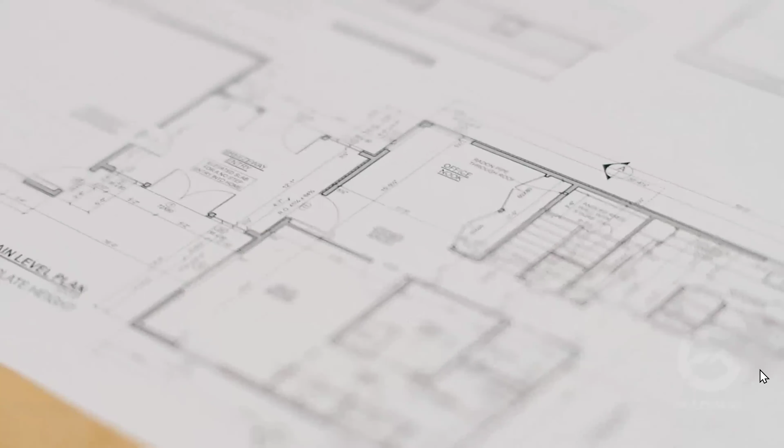This house was designed by a committee with lots of good people with background and experience. We believe in Tesla's corporate vision of creating a more sustainable planet. We got a hold of Greenway Solar, a Tesla certified installer for the Midwest area.

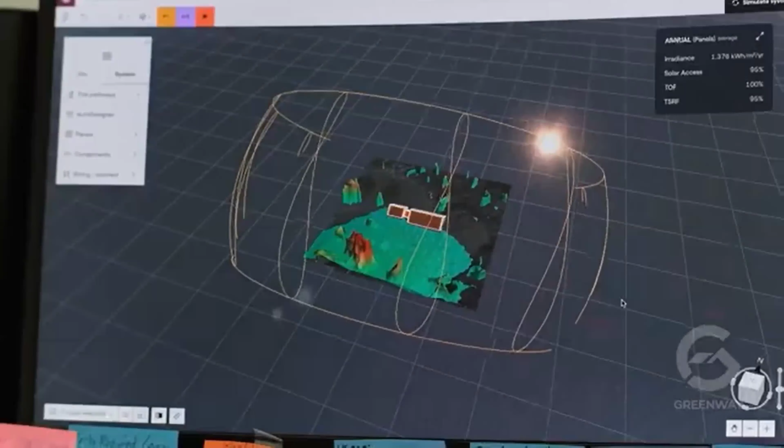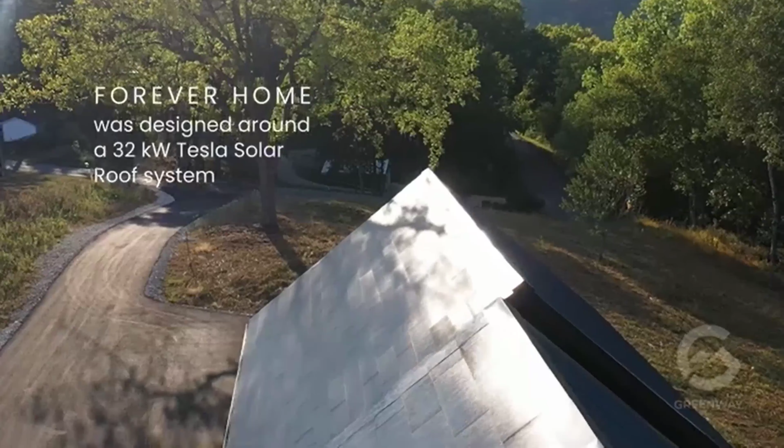And then we worked with Aurora software to position the house on the site so we got maximum solar benefit. Between the roof and the garage, our system generates 32 kilowatts of power. We have a SPAN smart electric panel.

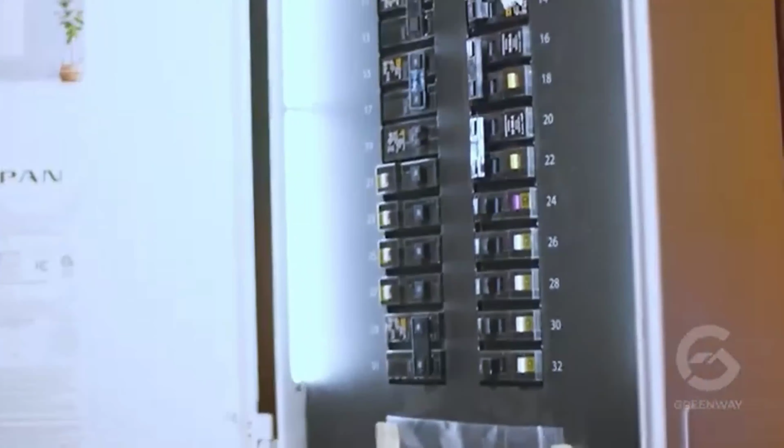A smart panel is something that can be controlled remotely. It also allows us to monitor home usage. We have a car charger in our garage, and that is our number one energy use. Then the heating system is second, the water heater is third. My office, with just the computer and printer, is our 4th largest energy user in this home.

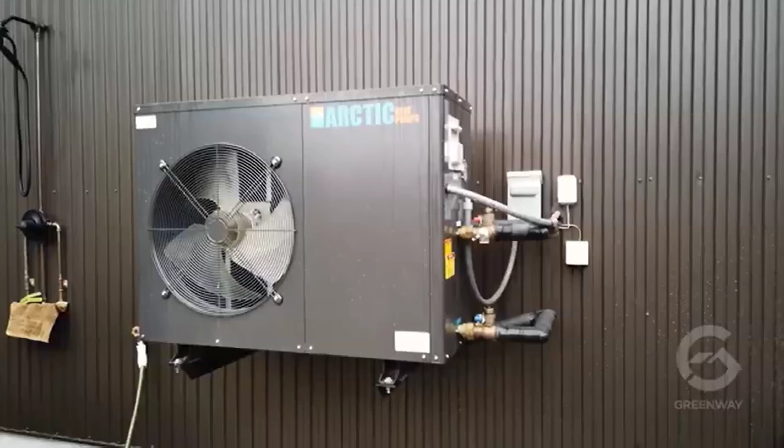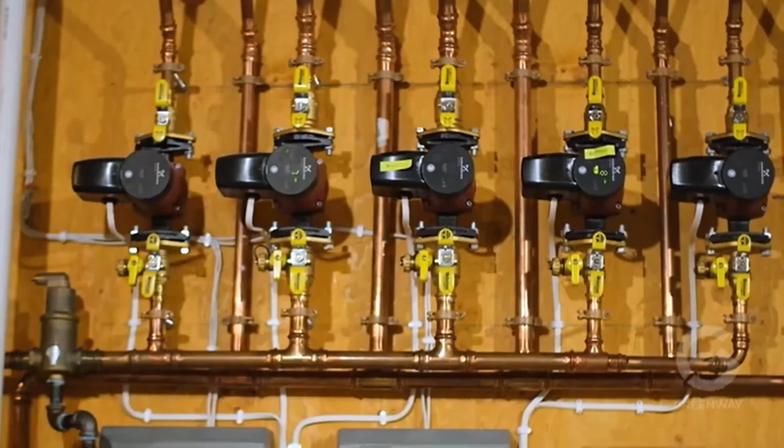So this is our Arctic air-to-water heat pump. It heats and cools the whole building. It's rated at 2.5 tons. This uses water to take either the heat or the cool into the house, and water is a much more energy efficient transfer mechanism. Good down to 22 below.

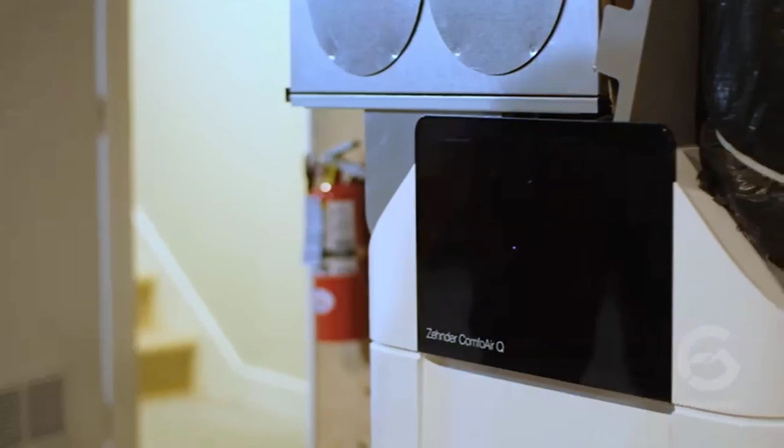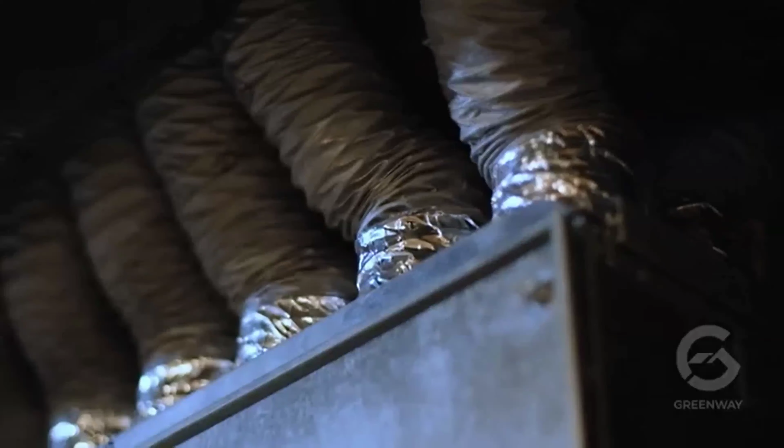So the advantage of having an airtight house is it takes less to heat it in the wintertime and it takes less to cool it in the summertime. This is a Zehnder energy recovery ventilator. It's a Swiss system. These tubes in the walls, or you can see them overhead, go to the air handling vents in the building. The installation was flawless and went well.

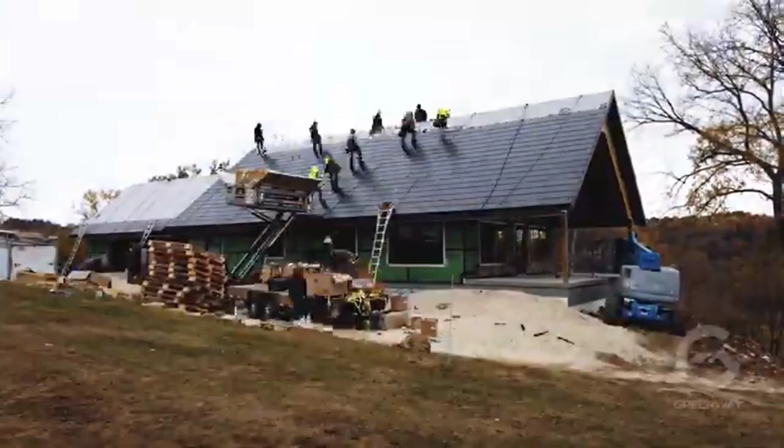They have electricians that are busy hooking this all together, making sure that each shingle is running, and they also make sure that each run of shingles is hooked together in series and working.

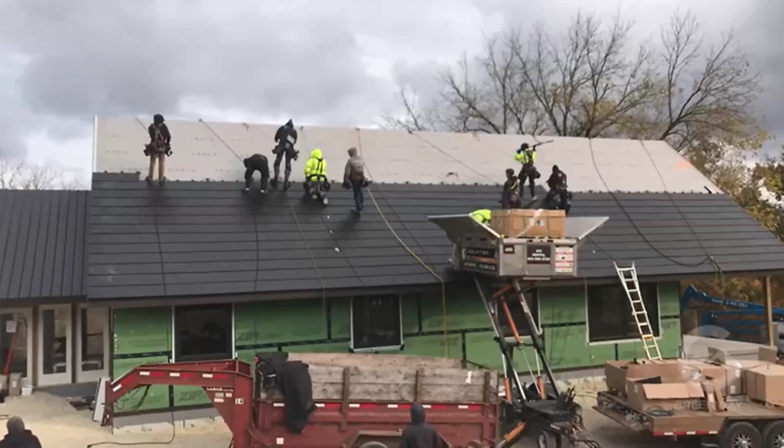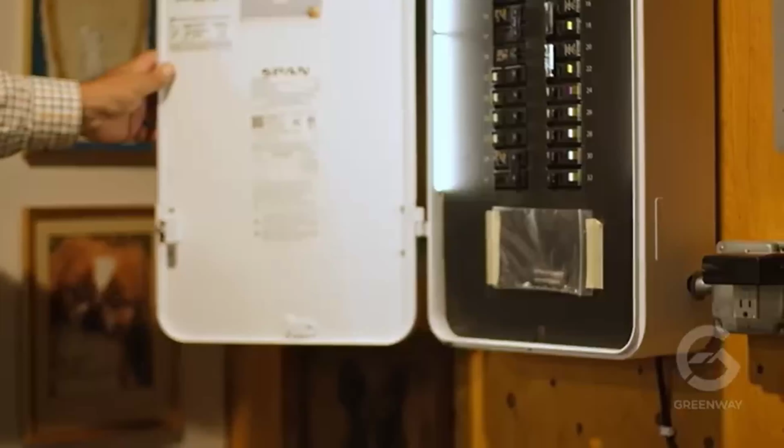Power comes down off the roof, and you can see these are labeled solar, PV, direct current circuit. So the direct current comes down into the inverters where it's converted to alternating current. It goes out into the gateway outside. The gateway then sends it back into the SPAN smart panel here, where it's used for the house, to the battery, or off to the grid.

The backup battery is 13.5 kilowatts. In the summer, we've gone 3.5 days with no grid power. So we're charging our car, we're heating our house, we're having all the electric benefits. And our system is making us money.

We just simply decided to pay ahead. For us, it was how to live as environmentally correct as we possibly could, to eliminate fossil fuels as much as we could. We bought our future.

All right, so that gives you a little overview on what we did. This is a Google Slide presentation that we'll step through.

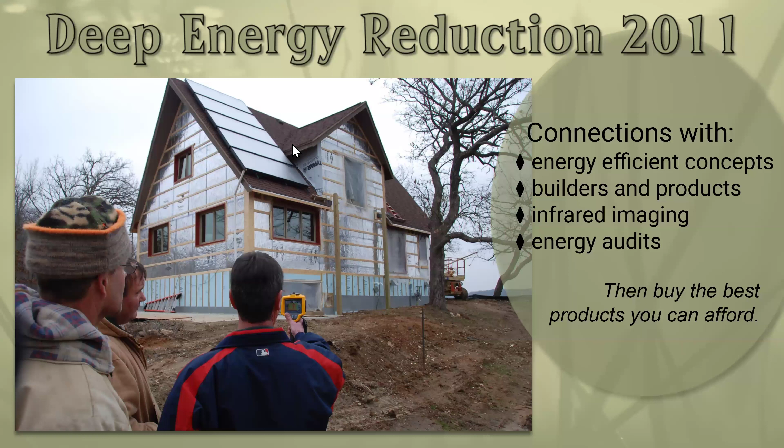As I said at the beginning, this was the residence at Eagle Bluff that we did a deep energy reduction retrofit on back in 2011. Based on one year's energy data once it was completed, we reduced the energy use in that home by 78%. You heard that right, 78%. We became the 9th home in North America to document greater than 70% energy reduction.

We basically did it by super insulating the envelope. When we're done, I'll have some more slides about that to give more information. These are the two builders: Jeff Valine from Zumbro Falls and his partner Joe Yenny.

We told these guys as we were doing this that we were going to bring in thermal imaging to make sure and find out where there were any leaks anywhere in the building before we allowed them to put the siding on. They are fantastic builders to start with, and they were meticulous about caulking and sealing any crack in the insulation. You can see everything is taped, and it's done as well as it could be.

We ended up almost at passive standards, which is unheard of for a remodeling project. We did solar hot water, and if I had to do one thing over again, I probably would not do that. We also did it because we were an environmental learning center, as a teaching aid, by having a college come in with their students and install this—and their installation skills could have been better.

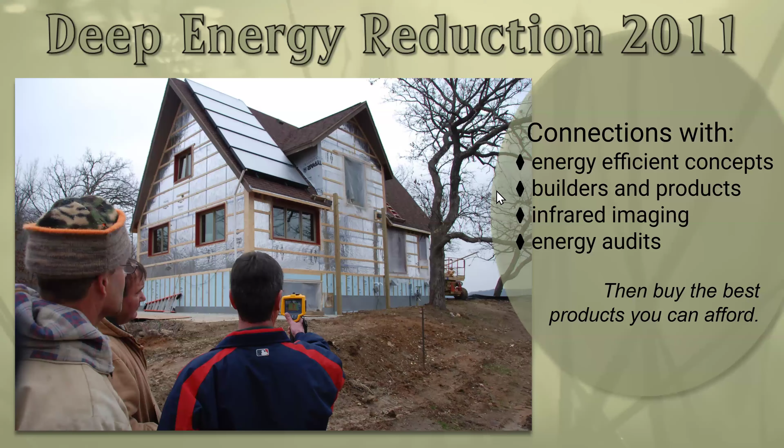You can see the things that we learned: energy concepts, working with builders and products, thermal imaging, and we did energy audits. So if you can't afford to build a house, you can do an energy audit and find out what's the biggest bang for your buck. That's what everyone needs to start out doing—an energy audit—to figure out what you can do to improve where you live, and then buy the best product you can for the money.

This is kind of a timeline of how it went doing our building. We decided to build in December. In January, we found out that solar shingles were available in Minnesota, and we put money down on solar shingles, not having a location or a building yet. We then used Google Earth to identify 3 sites in Lanesboro that had solar potential. We talked to the landowners and ended up purchasing the most favorable site.

Then we worked with a home designer and a good crew to design the home. And then in May, we actually got around to getting going on the whole process.

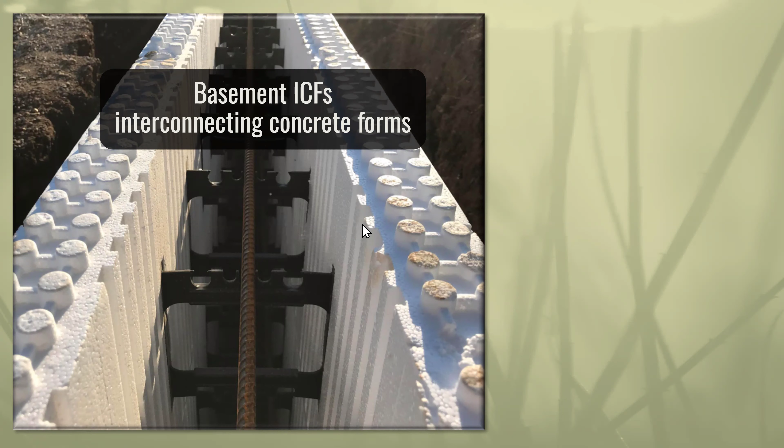So for conventional building, the basement has ICFs—interconnecting concrete forms—which keeps the cold out and the heat inside, and is structurally sound. We have in-floor heating zones in the house; we have 2 of them. We also have insulation underneath the basement floor so we don't heat all the ground below us.

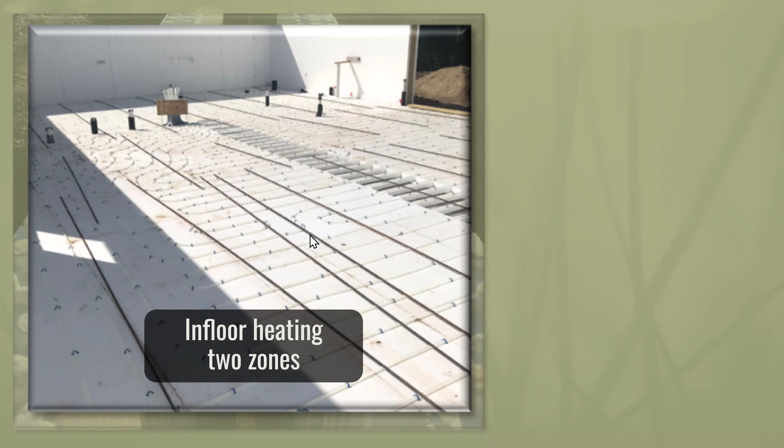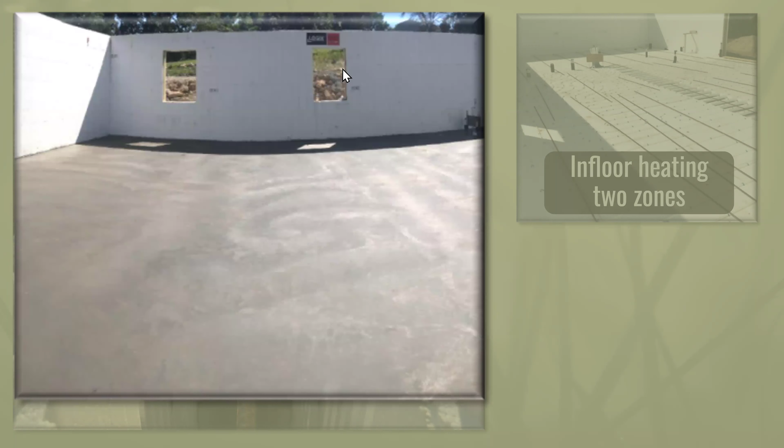What it looked like when it was done. So it's a walkout basement. These are egress windows into the 2 bedrooms in the basement, so you can see everything in the basement.

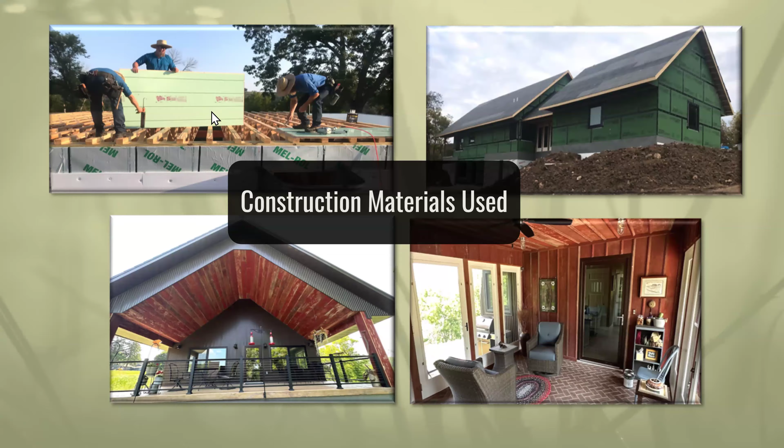We used various different construction materials that are pretty much industry standards. We started off with warm board, which has our in-floor heating in it. You can see it's tongue and groove, but this is a stamped aluminum panel over the structural wood, and the aluminum dissipates the heat or cold across the whole panel. So you don't have a hot spot here and a hot spot there, it warms up the whole panel.

Our building crew was 4 Amish brothers, and they were just a hoot to work with, fantastic on doing this. They were busy but wanted to do this house because they wanted to learn about solar shingles and battery storage. Kind of the fun of this whole process is that most of the contractors, since we didn't start working with them until May, were basically booked for the summer, but added us on because they wanted to work with the technology we're trying to put in place.

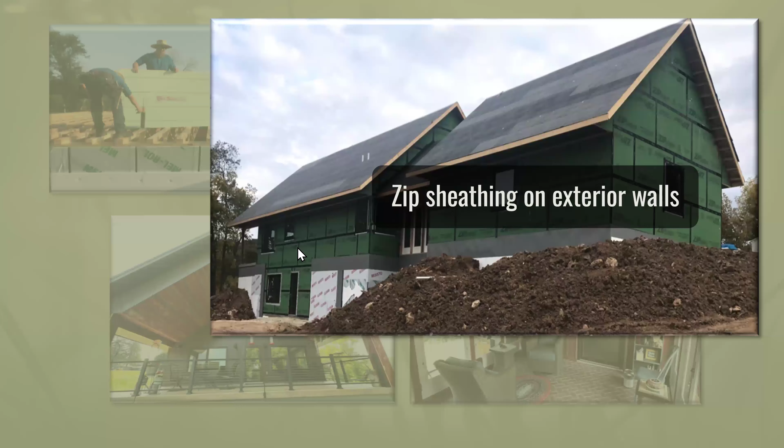So zip sheathing is this green stuff. It basically has an impervious membrane on the outside, a structural wood component, and some sort of insulation depending on how much you want to put on the inside. You take all the joints and it gives you truly a waterproof exterior membrane.

I grew up on a farm in Red Wing, and there's a picture of the barn right here. We ended up taking down the barn about 12 years before we built the house and stored the barn siding and beams, finally getting around to using it in the construction of our home. This is our east-facing deck with the barn decking on it. This is our breezeway, and you'll see photos of the interior of the garage, which also has the decking. We used some of the beams on a pergola off to the north.

Heating and cooling. This is an Arctic air-to-water heat pump, out of Canada. It's air-to-water, not air-to-air, which is more energy efficient. It works down to 22 below, so it's been a very interesting system to have.

We've got basically 3 winters under our belt, and it's worked really well handling our heating and cooling. We have 5 heating zones, and our basement heating zone, because there's so much heat on the air handling system brought down in the basement, wasn't running enough, so when we actually called for heat, one of the pumps was frozen up. I had to replace a pump, not because of overuse, but because of underuse.

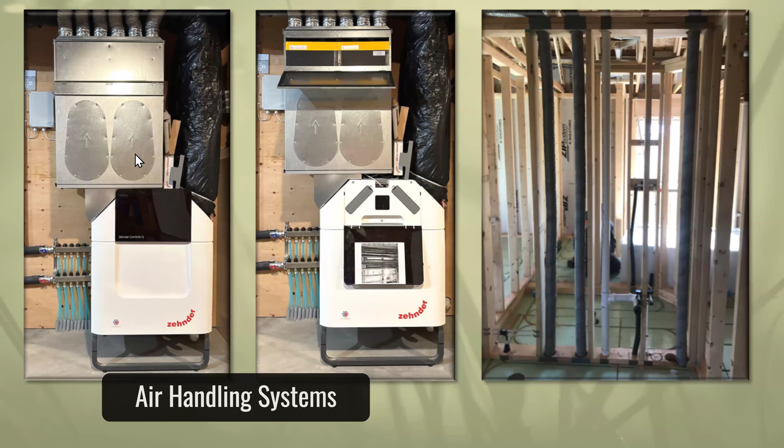This is our Zehnder, which is a Swiss air handling system. The air handling system uses these dryer vent-like ducts that run right into the stud wall. You can see them going out the top. It has 2 replaceable filters that you can replace easily, usually on a quarterly basis.

On top, it has an activated charcoal set of filters and HEPA filters. The HEPA filters take out all those nice little things, and all the nice little Canadian smoke that comes in that we don't want to breathe. It's a very quiet system, and the replaceable filters make it inexpensive to have clean air going through your house 24/7, 365. We also have a carbon dioxide sensor to monitor, depending on how many people we have in the house, what speed we want to run the air handling system at.

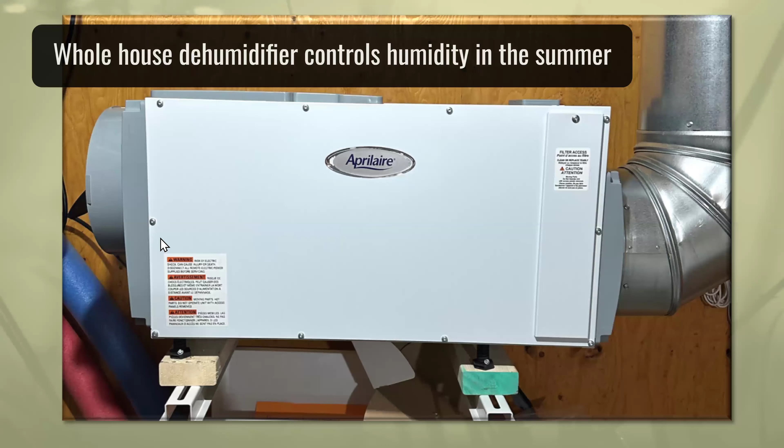We have a whole house dehumidifier, and the importance of this is because we have in-floor cooling, you heard that right, in-floor cooling in the summertime. If there's a high dew point or high humidity in the house, we could have condensation on the floor. So the heating system has a humidity monitoring gauge that as humidity in the house goes up, so does the water temperature in your cooling water, which we don't want because we want to cool our house down. So the function of the whole house dehumidifier is to take the humidity out of the air so we can have cold water cooling our house.

Talked about the SPAN Smart Electric Panel, which cost about $2,000 extra. It was one of those things you kind of wonder about, is it worth the money? I want to show you this slide.

One of the first months we started using this, I think in February, this is March 17th, shows our backup boiler, which was supposed to be providing secondary heat, was running 66% of the time, while our Arctic heat pump was only running 8% of the time. Without this, I would have been clueless, we wouldn't have known the backup boiler was set improperly. We had to get it recalibrated, or we would have had a tremendous electric bill for heating our home. So this paid for itself the first month.

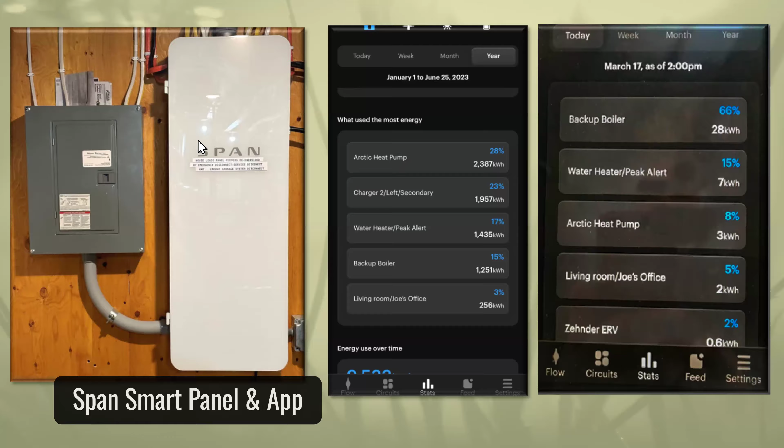This is the SPAN summary data showing what we did. In the first year, only through February 15th, so about 10 and a half months, the house produced 42,000 kilowatts, consumed 23,000, got 8,000 from the grid, and exported 27,000. You can get all this data and check your circuits at any point in time.

It has 3 different levels. If your power goes out and you're on must-have circuits only, we'd have 8 hours and 32 minutes of power. Any time you get notice the power's out, you can add or drop circuits remotely, wherever you are. If you want your whole house running, you've got 2 hours. Depending on your battery charge, there are things you can do to adapt how long your battery will last.

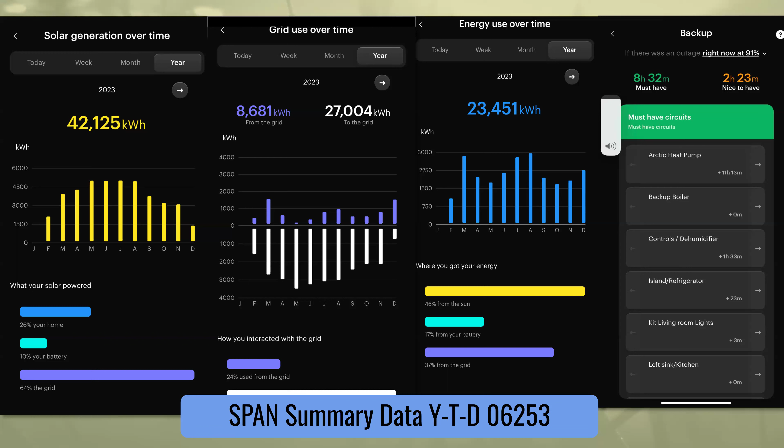We have data from this summer when the power went out at 7:30 in the morning. Our battery was at about 13% when the power went off. The power was off for half an hour, and the battery powered the whole house during that time. When the power came back on, our battery was up to 18% — it had actually increased its storage while powering the whole house.

These are Canadian-made Access windows, so it's ACCESS brand windows. They open in and also open up as an awning window. They're triple pane windows that are very energy efficient. When the Amish were building, they'd walk along the side of the house with their shirt sleeves rolled up just to see if they could feel any cold air on the hairs of their arms.

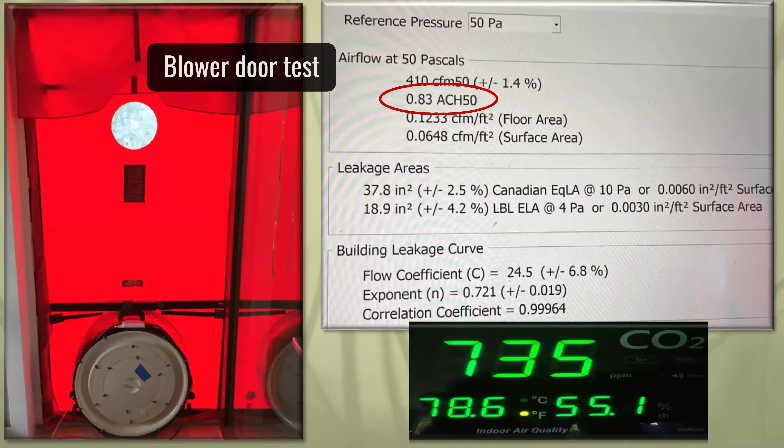We did a blower door test when the house was complete, and at 50 pascals we measured 0.8 air exchanges. To be passive standard, you have to be at 0.6, so we were 2/10 away from passive standards, which we really weren't trying to achieve.

As I mentioned, we have a carbon dioxide sensor that gives us an idea of the CO2 levels in the building. Mary and I are here by ourselves most of the time. Sometimes we have 2 to 8 friends over, and we click up to speed 1. If we have 20 people over, we click up to the 3rd speed, and if we have more than that, we open the windows because our carbon dioxide levels go too high since the house is airtight.

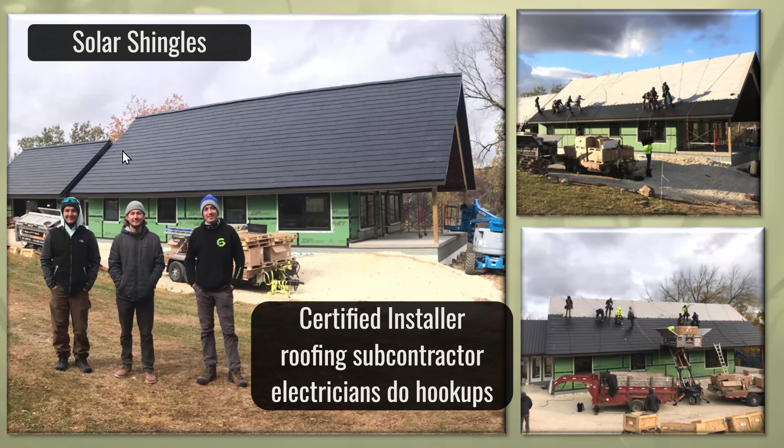The solar shingles you can see both on the house and the garage provide 32 kilowatts of power.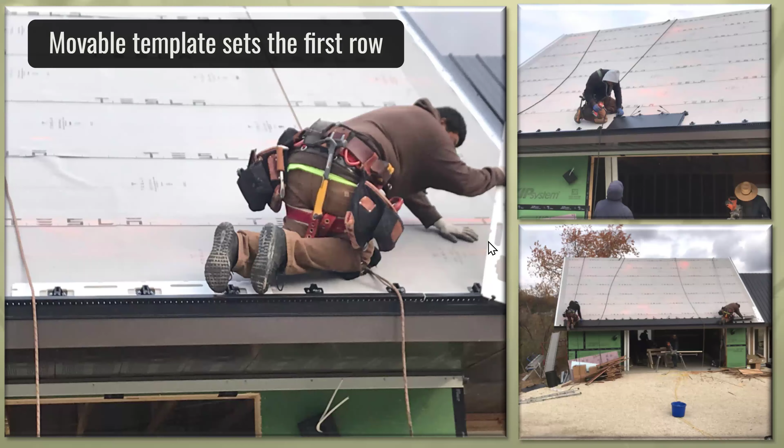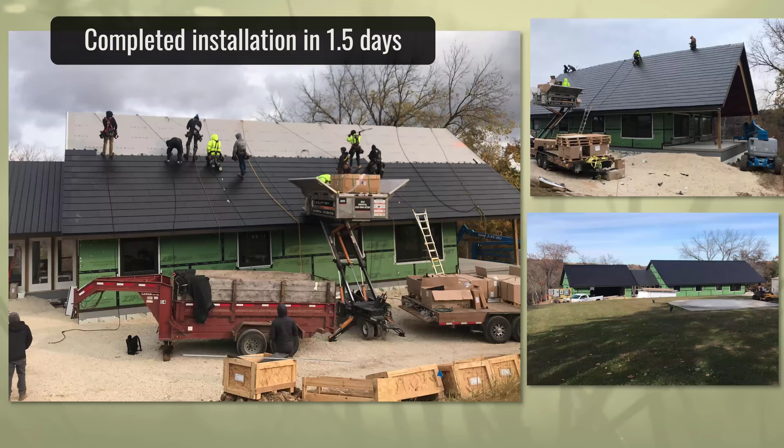It was an easy installation. They have templates they put down that position the hangers in place, then they start putting the shingles down. The shingles are screwed onto the roof deck, which has ice and snow melt underneath it. Then clips on the bottom fasten into place, and they're easy to install. If one has a faulty problem, they can easily replace it, assuming they can get up on the roof. It took them a day and a half to do the whole installation.

Greenway Solar was just fantastic to work with. We haven't had any issues, so I highly recommend them to anybody in the Midwest.

These are the runs of the shingles. If you're the electrical engineer type, you can see there's 28 shingles in this run, 28, 20, 33 coming down here, going into the inverters, out to the generation panel, the AC disconnect, the PV production, into the gateway, which sends it to the main service meter, back to the Powerwall, into the house, or into the smart panel.

So we had 443 solar shingles that are 72 watts each. You've got all the information here — if anybody wants access to this, let me know and we'll send it off to you.

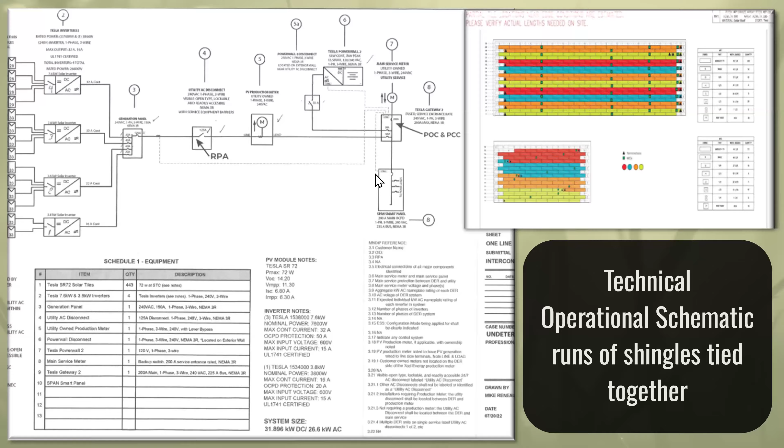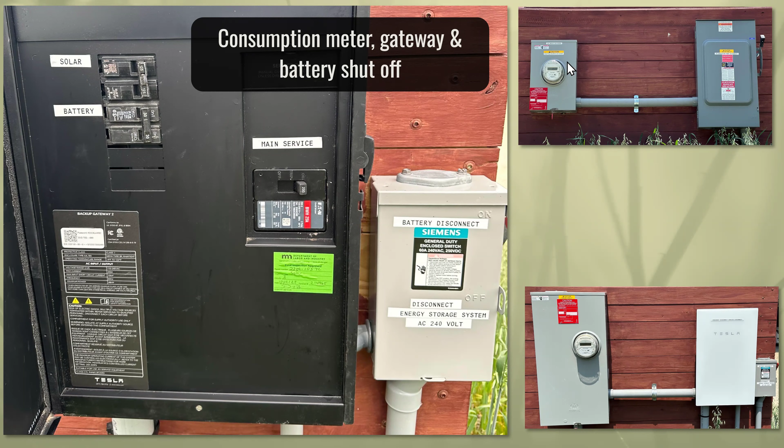This is the outside electric panels. This is the gateway, if you will, consumption meter. There is a battery disconnect external to it. Here we go.

This is our Powerwall backup. The Powerwall is 13.5 kilowatts in size, and you can set it to discharge down to whatever level you want. Here you can see we have it set to discharge down to 10% every night at this time, and then during the day it recharges.

So if we turn our hot water heater off at night, this is where we went 3 days without any solar, but that was with the hot water turned off. You can see we can actually make it through the evening using just battery storage. However, we seem to like hot water, so for the most part we don't do that, but it's possible.

And then if there is a NOAA weather alert, the battery automatically charges to 100% and stays at that level until the weather alert expires.

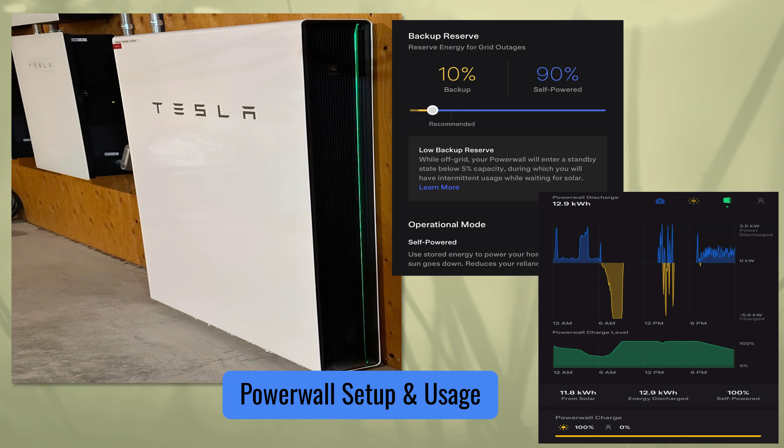So this is the solar shingles main Tesla app. It has 3 different screens: energy, impact, and settings.

You can see where we were at on how much solar we generated on an individual day. And these are the settings on the Powerwall, how to do EV charging, your storm setting, what your utility plan is, Wi-Fi, and other things.

So this is some data, and it has these 4 different screens that you can see. What's circled is what's shown. This is the house - started off not using battery, used a little battery, and then we're using grid power. The gray is grid power, using solar power, back to battery and grid. So that was what the house used and where the battery came from.

This is then solar power. Solar started off powering the house, powering the battery, house and battery, all going to the grid, back to the house and battery, and just the house. So 30% went to the house, 34% to the house, 6% to the battery, and 60% went to the grid during that particular day, May 2nd, a peak solar generation day.

We generated 234 kilowatts. This is just the Powerwall - we didn't make it through the night because our water heater was on, and then this is going off to the grid, power coming in from the grid, power going out. So our net grid usage for that day was negative 134 kilowatts.

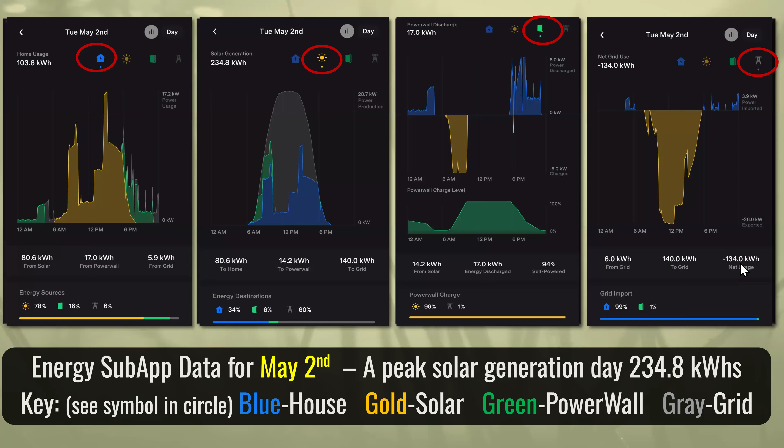This is what I was mentioning earlier. We had a grid outage, and you get this little notice that appears on your phone, on your app, saying there's a grid outage, you've got 1 hour battery backup left, reduce your power immediately.

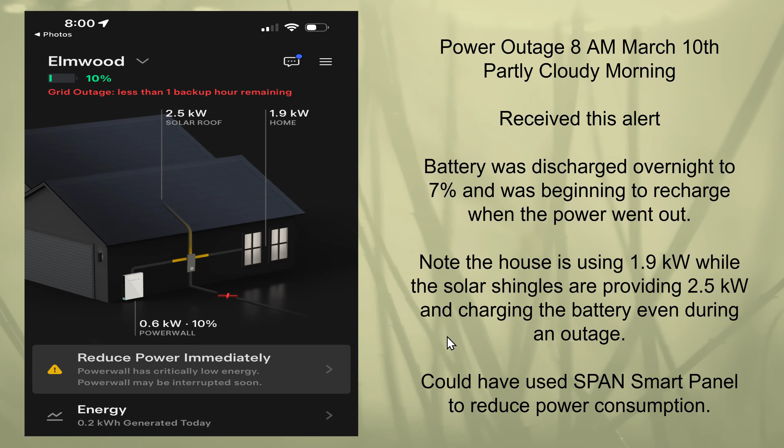And as I said, it was a partly cloudy day. The battery was down to 7% when the power went out. The house is using 1.9 kilowatts right now, and the shingles are providing 2.5, so it's providing 0.6 kilowatts more than we were using. And then, as I said, we have the SPAN smart electric panel, which automatically sheds load, but you can also control individual circuits remotely.

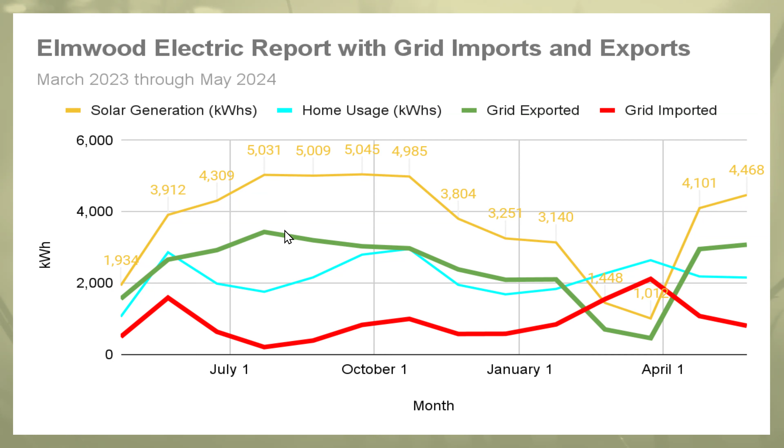And what we're most interested in at some point in time is vehicle to home or vehicle to grid - Tesla calls it power share. If you're looking at our backup battery, remember it's 13.5 kilowatts, and we paid about 15 grand for that, or $1,000 a kilowatt. The battery we have in our car is 75 kilowatts. So you have a lot more battery power in a car for a cheaper price than you can buy batteries for your home.

So we can get vehicle to home or vehicle to grid and get power sharing in place. That will be a great addition to homes in Minnesota during winter months when solar production is low. This is already available on the Ford F-150 Lightning pickups and the Cybertruck, and supposedly the software is available on newer Tesla cars, but it hasn't gone to full release yet.

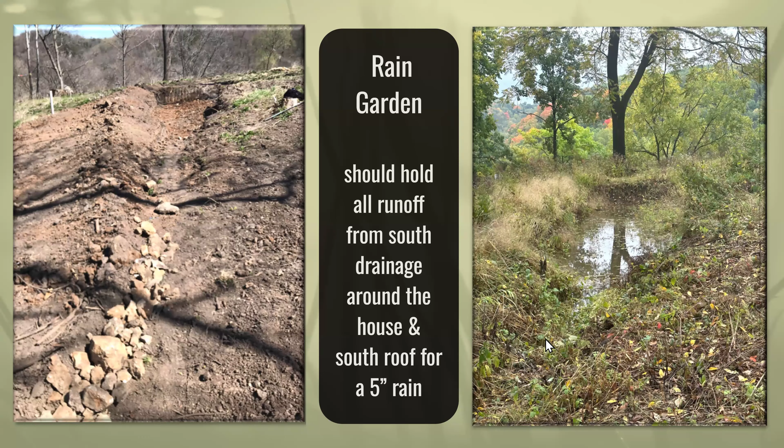We have a very small amount of lawn that we mow, and most of our lawn is a short grass pollinator prairie.

Joe, are you still there? It appears not — I'll give him a quick call and see what happened on his end. Yeah, his face is frozen in the gallery, so his internet probably dropped.

Ted, how was the spaghetti? Sorry, you're muted, Ted.

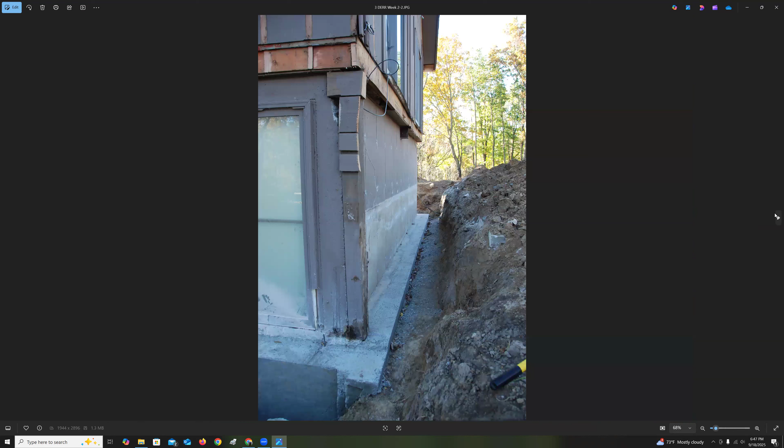So when we did the retrofit, it turns out this house is a CAP home, a prefabbed house that was brought in, and they poured the concrete foundation 6 inches short on the west end and 3 inches short on the north end. So we had a 6 inch overhang here and a 3 inch overhang there. Prevailing winds are from the west-northwest, and our hydronic heating system pipes were located right up above that. So every time we had a blizzard, those pipes would freeze up and either rupture or burst, which made living there interesting.

So when we did the reduction retrofit, we put in new footings all the way around the house. We corrected the 6 inch overhang and added 6 additional inches of insulation, so we have 9 and 12 inches of extra insulation around the basement.

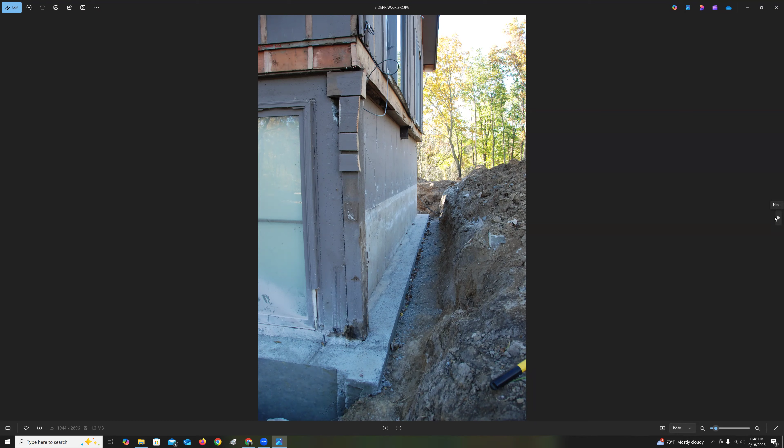You talk about an improvement on the energy efficiency of the basement—let me tell you, day and night.

We were looking at trying to do thermal heat storage. We were trying to put in something like a big bulk tank or water storage system where we could take extra summer heat and store it for winter consumption. But we couldn't find any storage system that was energy efficient enough to store the heat for long periods of time and still get a payback. So we ended up filling that in.

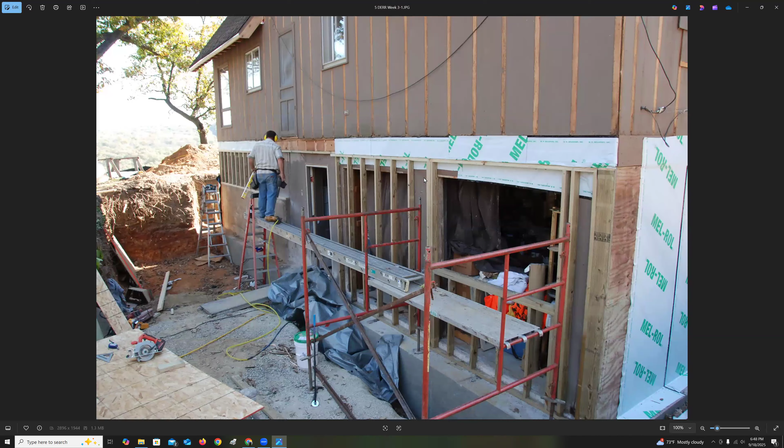But here we are, truing up the 3 inches to add the 6 inches. We eliminated the glass patio doors to the north here.

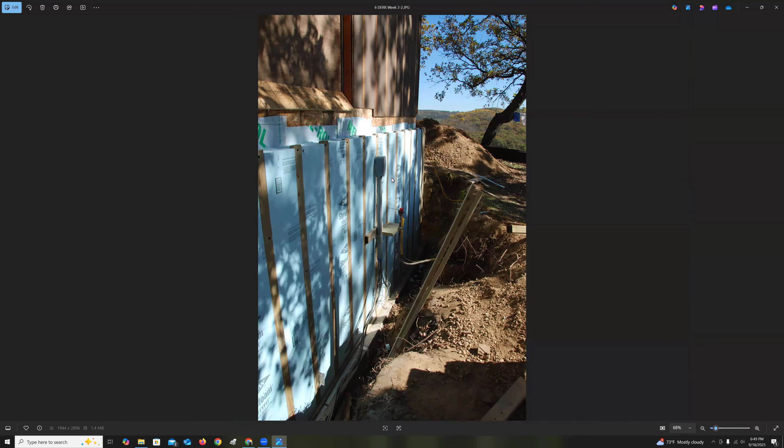So this is our 6 inches of XPS being added along the exterior, holding everything in place. And we have an exterior deck that is no longer cantilevered off the house, so we don't have thermal bridging coming off of that.

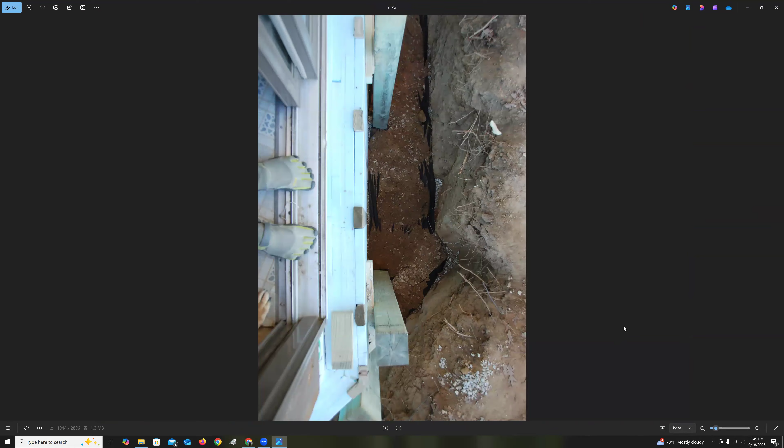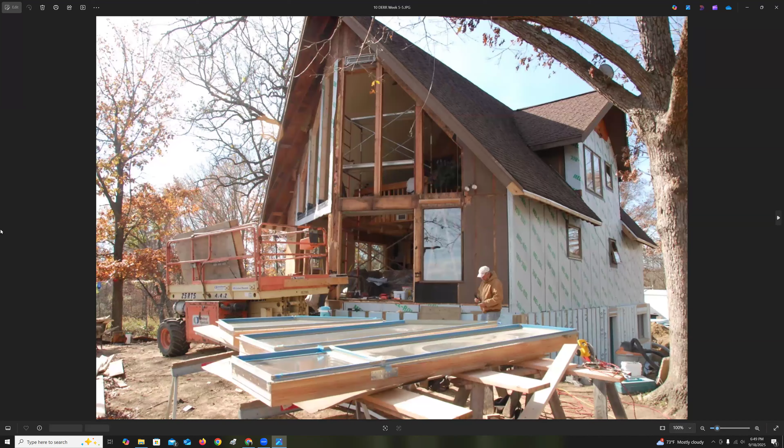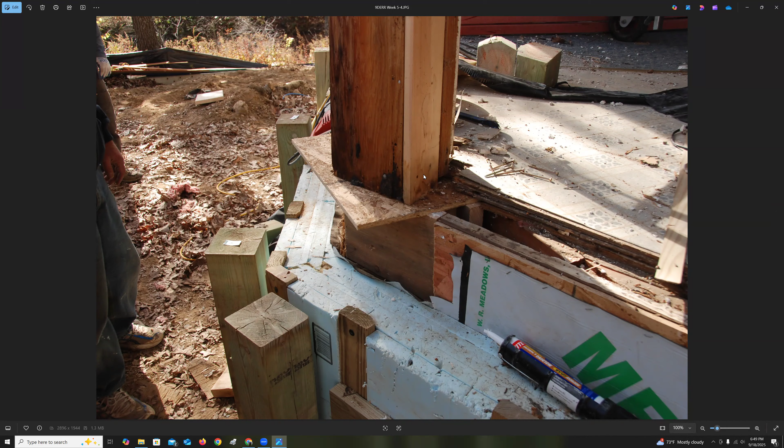Every seam, as I said, was caulked. They were overlapped—the builders did a fantastic job sealing everything up. The main wall with all this glass right here basically had a 3/4 inch gap underneath it, where it was freestanding, hanging off the roof. So we ended up correcting that.

We took out this window to the north, and these two windows to the north, and we ended up adding a window to the south. It was somewhat of a sacrifice to take away the tremendous view upstream, but we ended up getting a functional window to the south.

You can see these were Loewen, another Canadian company, triple pane windows that we ended up installing. It made it a little bit brisk living at the house at this time of year.

So you can see there's the windows gone—installation on the south side. Window gone here, two windows gone there. Insulation on the bottom.

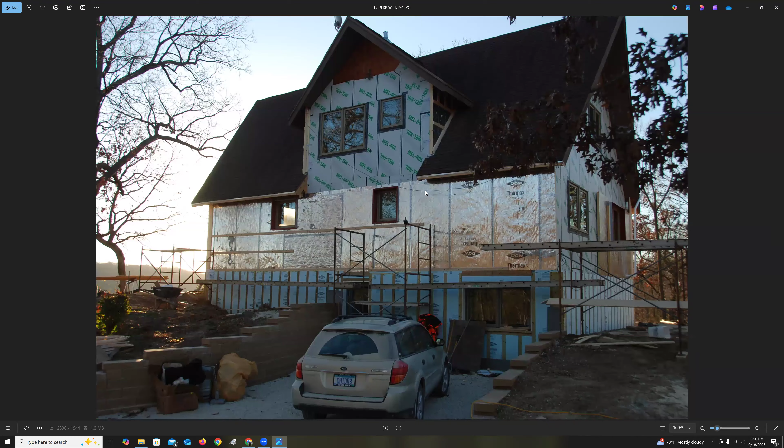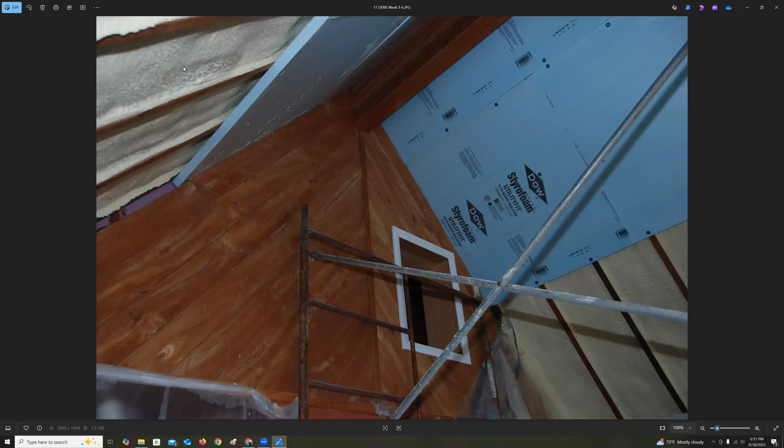So this is a thermal insulation being put in. We put in 2 inches of closed cell foam on all the rafters and stud walls, and then added XPS over that, which basically sealed up the whole house.

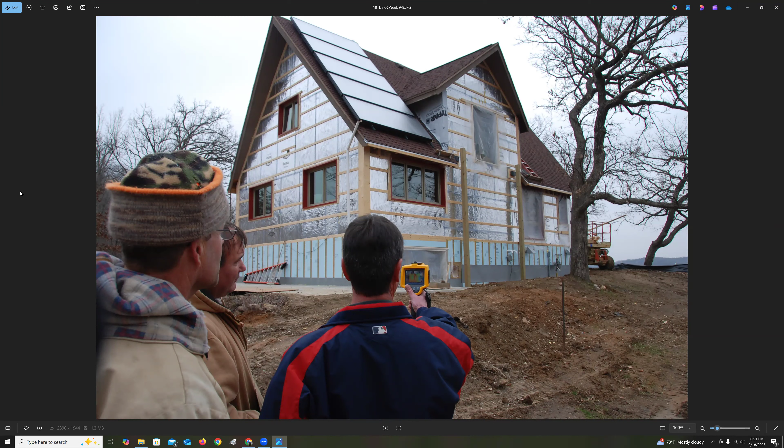I don't recall what it did to the R-value, but this is where we were making sure everything was done the best it could be. So I said we had solar thermal, we had 11 kilowatts of photovoltaic panels off site here. This ended up being a mounted grid to the south, or a mounted deck to the south.

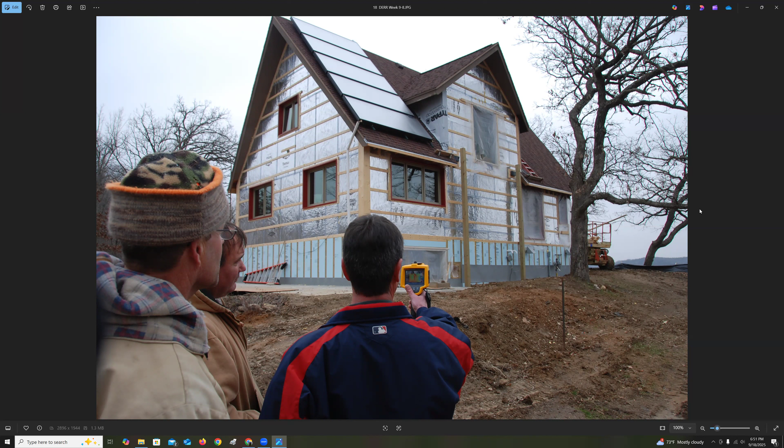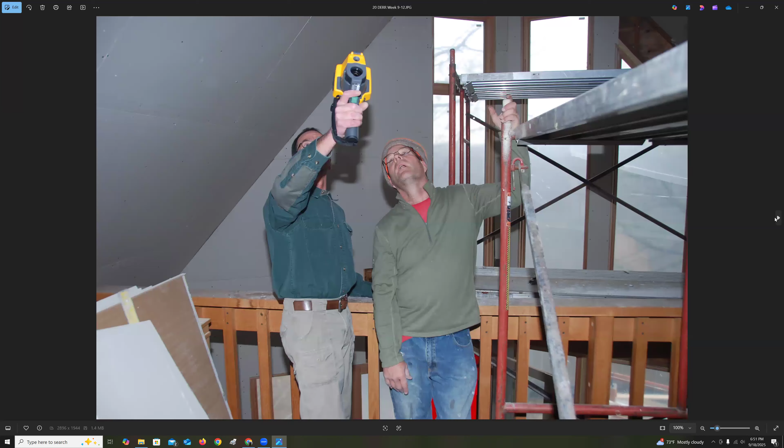Joe, is this the house you and Mary were living in? Yeah, at Eagle Bluff. Wow. So this is where we kind of cut our teeth on energy efficient building. And like I said, we lived in it during the remodeling, which might not have been the wisest thing.

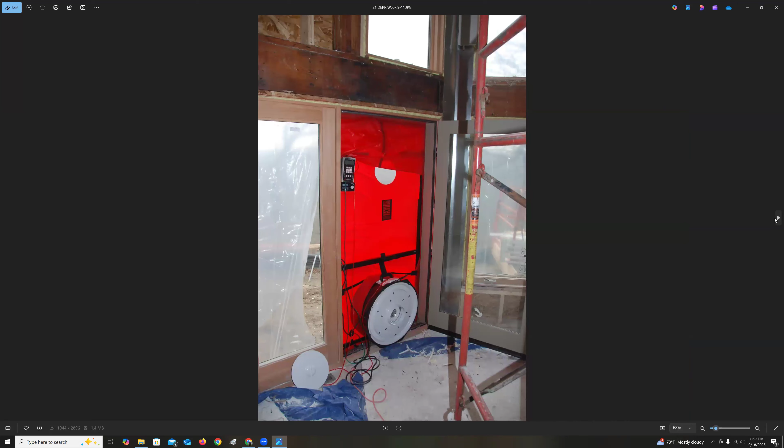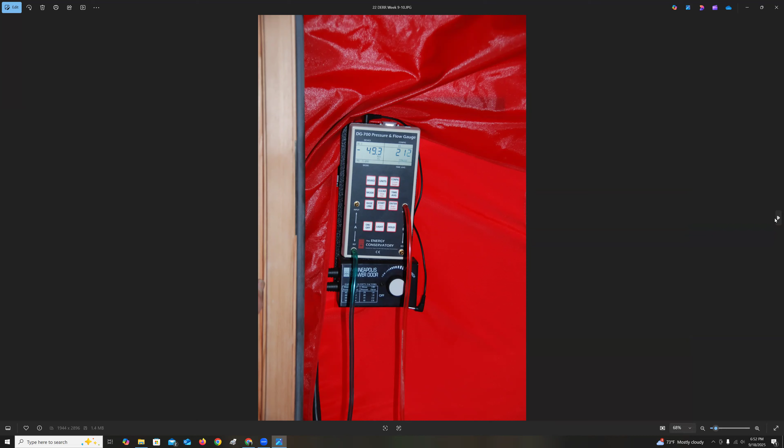Blower door test there—we did a blower door test before the remodeling, and it would have been the equivalent of having the patio door standing open 6 inches, 24/7, 365. The house was so leaky. If you heard me say 6 inches on a patio door, you heard it right. It was a very leaky house. So there we are at 50 pascals.

And that's still being used nowadays, right? That's correct—the current director of Eagle Bluff resides in the house now.

I thank all the people that have been involved in the process. We enjoy the house we live in.

As Doug said, we have a QR code out in the driveway, so people in their cars can scan the QR code when they're driving past, and it takes you to the video that you saw.

About once a month, we probably get someone who is brave enough to walk in and say hello, because like the MREA and ASES solar tours show, you have a lot of people interested in the concepts, but only a small percentage who are really ready to build, ready to lock and load, and really want to get the best answers they can. So it's people ready to lock and load who want to kick the tires and see what it looks like.